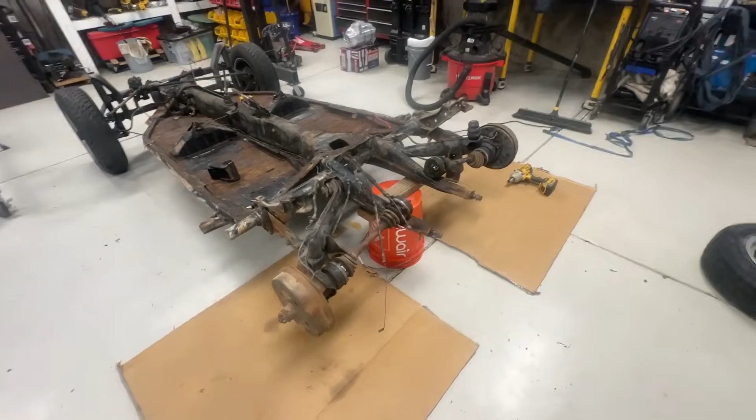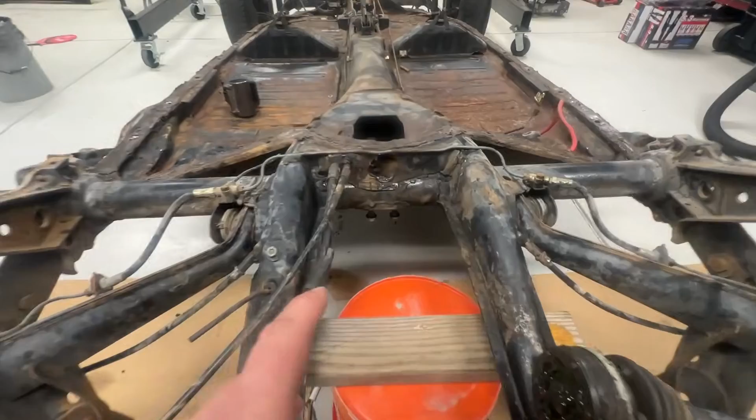And with that, let's go ahead and start taking it apart and see what we see. All right, so this is kind of nice because I've already got the engine out, transmission out, so you really get a good look at what we're working with in the back of the VW Bug. And if you look in here, this is the part that we're going to be cutting out for the torsion arm adjuster. Here's one of the problems I see.

Here are the mounts for the transmission. I'm not sure if they're different in other bugs, but that's what I've got. So somehow after I make this whole torsion arm thing in there, I've got to reconstruct that transmission mount. But to get started, I think we'll probably get rid of the brake lines first and get those off and out of the way.

We'll get rid of the drum brake and all the hub there. The half shafts should come out of there nicely. We'll get the trailing arms off. We're gonna be doing a rebuild on those in the next video. And then we'll start getting the spring out of the torsion tube there.

And then I'm interested to know what we see inside there. Is it the same size splines that go with the Sway Away or not? How's this thing gonna go together? It's all a mystery. We're about to find out right now.

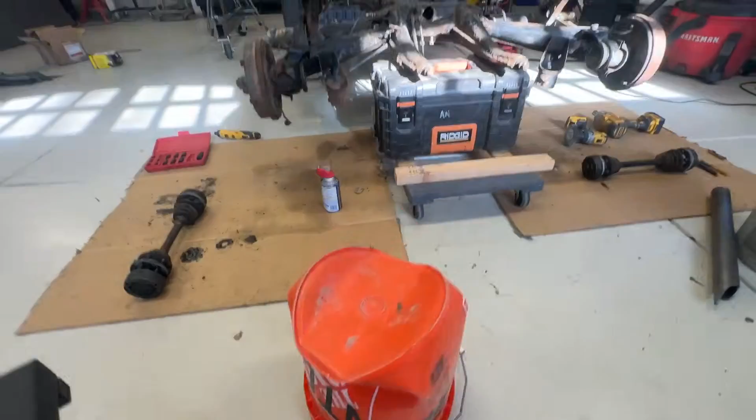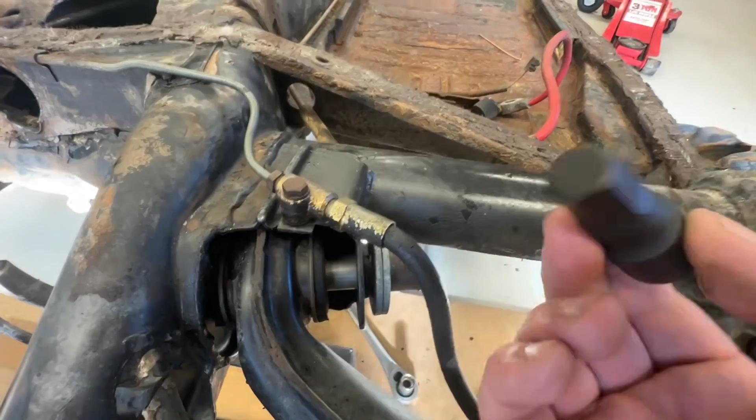Okay, so as it turns out, a Home Depot bucket is not up for that task, but maybe a Ridgid toolbox is. These bolts right here, however, were a lot more difficult to get out than I had expected. It's a 17 millimeter Allen tool, and so that went in there and it came out no problems. I know people replace those. I'm not. I opted just to go and buy the tool kit.

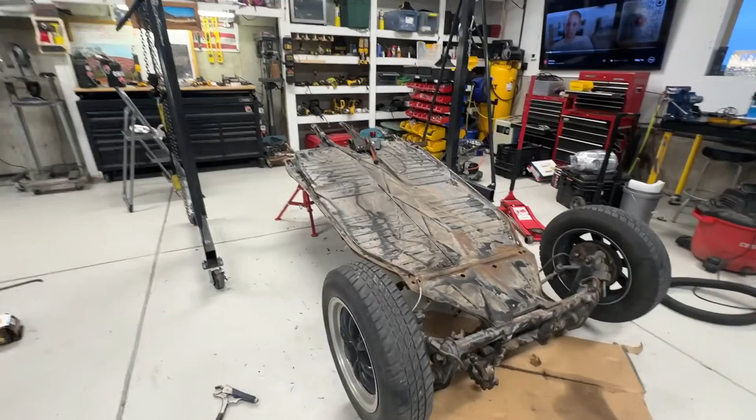So there you go. Time to work on this one. I can't believe it. I forgot to video us flipping this thing over. So basically, with the way it is right now, it just took two of us and we flipped it straight over. It was about 10 feet high, which just cleared my ceiling, and then we put it down on some jack stands over here. Let me show you what we got going next.

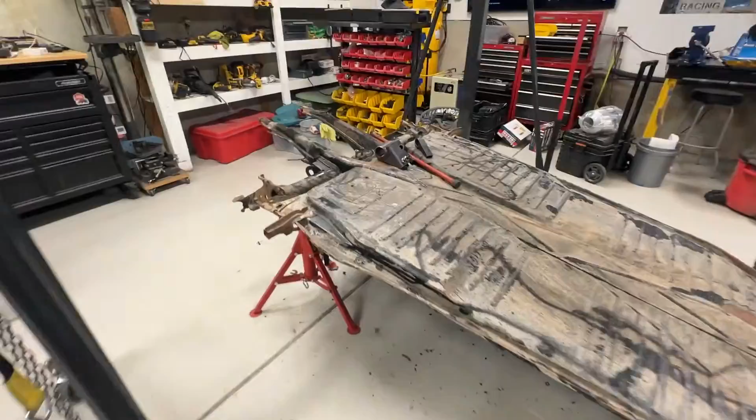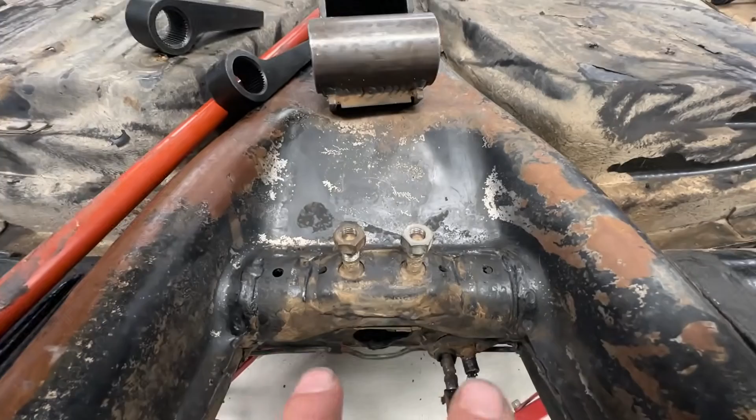Now that it's upside down, I think it's kind of almost important that you do put this thing on with it upside down. This is what I got to cut out. And not all bugs are like this, because I showed this to one of my other buddies who race these things also. This is a transmission mount and not the way others look, I guess. So I got to figure out how I'm going to deal with the transmission mount here.

But anyway, this is what we're putting in here. And so all I'm going to do is basically center this thing up, scribe the lines on here. I'm going to cut the tube right here. I'm going to cut this tube right here. And then I'm going to cut out enough of this such that I can get this thing basically mounted inside there, but also kind of do some welding in there from this side.

I have to flip back over, do it from the other side also. And then the plan will be to box this thing in there. And from what I've been talking to the guys, it doesn't matter how this thing is oriented once it's welded in there, because basically these fingers are in there, and once these bolts push these fingers down, this is upside down, it forces the suspension that way and gives you more or less lift based on doing that.

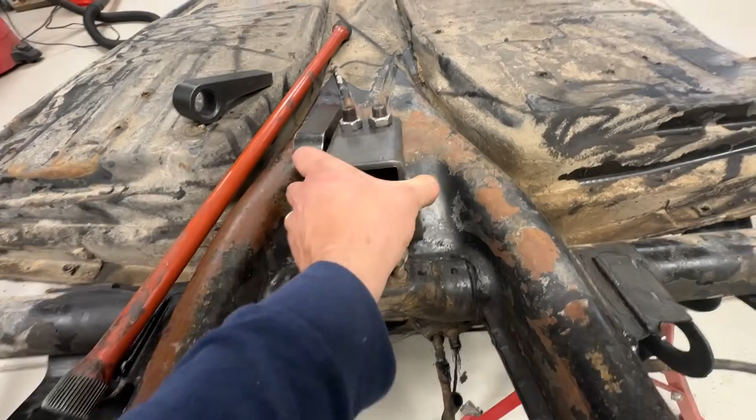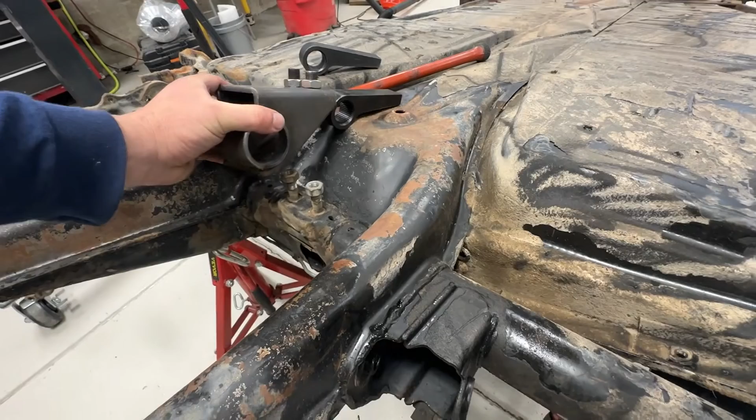But what is important is that these things are oriented enough down such that as rocks come across the body, they don't rip off one of these things. So it'll probably be oriented something like this, kind of facing down, as opposed to level where maybe these things are vulnerable out there. Let's go ahead and get to cutting this piece out.

Well, it's always a little bit scary to hack into something like this, but not that big a deal. Here's the tube, let me show you the parts I got here. Here was the parts of that transmission mount. I might figure out if I can just weld, clean it up and weld that back on there, just because I don't want to make another one.

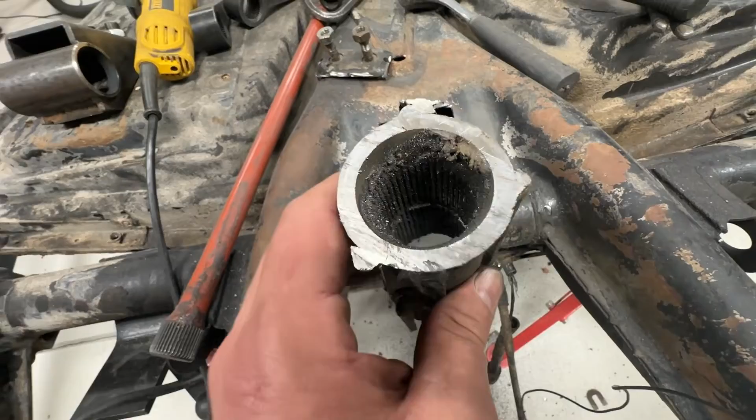Here's the piece that I cut out. You can see the splines in there. And the reason I'm replacing this is because the guys say you can strip these splines out, and these are a whole lot stronger. So anyway, I just do what I'm told. This piece now fits in here real nice.

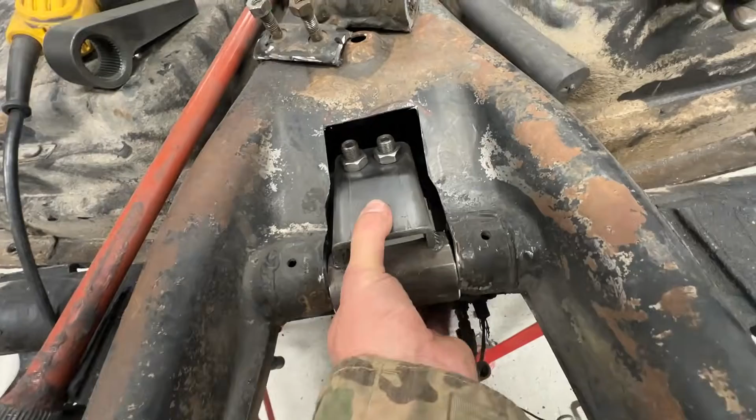So what am I going to do now? I'm going to clean up both edges over here and get ready to weld them. I'm going to do a combination of welding - some TIG welding where I can, so I'll probably TIG weld these parts. Then on the other side, on the inside, I'll probably do some MIG welding inside there just because I won't be able to get in there and TIG weld.

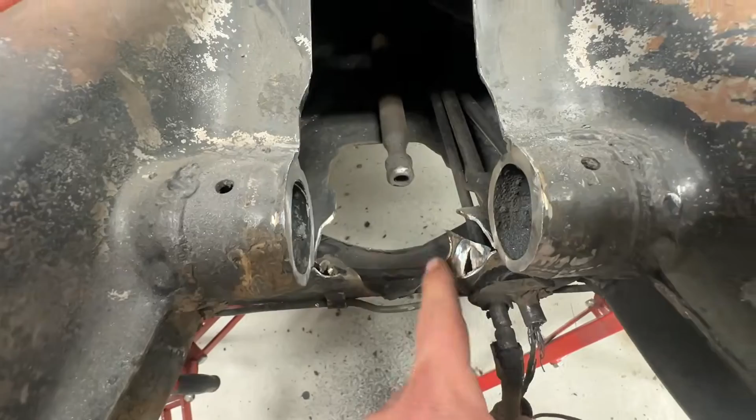I got to clean back some of this sheet metal. I don't care about sheet metal. I really care about strong welds to maintain at least the integrity of this tube here as much as possible, and then to resist, because this thing's going to want to, every time you hit a bump, it's going to want to do one of these - it's going to want to turn.

So what I'll do is these welds right here, obviously on the tube, will probably resist a lot of that. And then just for some insurance, we're going to box this in with another piece of probably 1/8 inch plate, which I'll cut on the plasma table. I'm going to show you how I plan on making this a box, I think, as easy as I possibly can on myself, such that I can get it in there and make it look real pretty without having to do a whole bunch of crazy math.

So let's go ahead and prep this area for some welding, and then we'll cut some parts out on the plasma table.

All right, well, we're going to do a little bit of CAD, computer-aided design, and I do this all the time. I do it for guys who are better fabricators than I could ever be, and they just say, I just can't learn CAD, for whatever reason. Well, if you can draw lines, circles, and squares, you can do computer-aided design.

It's super easy. So we're going to cut something on the Langmuir Systems Crossfire XR, and to do that, we need to first draw what we're going to cut. So we're just going to cut some really simple pieces. I'm going to go up here, and this is Fusion 360.

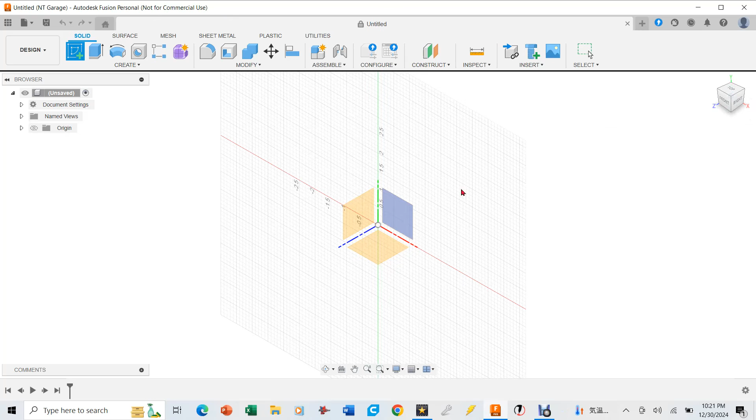I'm going to say I'm going to create a sketch. Over here, you see on this little block, it shows the Y is up and the X is to the right. That is the plane in which all plasma cutters cut on, and the Z is usually the torch height control. So I'm going to click on that plane. So now I'm drawing on that sheet of paper, which is the X and Y plane.

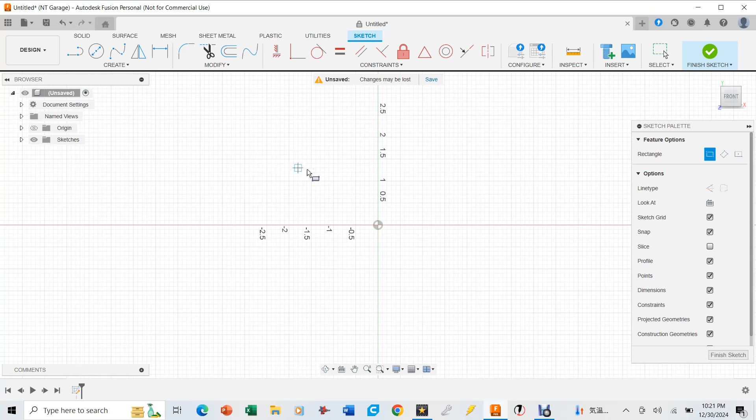So first thing I need to do is make just a rectangle, so I'm going to hit the hotkey R, and when I say hotkey, I'm clicking a key on my keyboard, and it brings up rectangle. So now I can kind of click anywhere, start scribing that thing out one time, and then once I've started scribing the line, I can just go ahead and punch in the values that I want.

So it's going to be 3 1/8 inches wide, 3.125. Let me hit the tab key to go over to the other side, and this is going to be 2 inches high. That's going to be one side of this closeout thing I'm going to make for this whole thing. So that is one shape.

Now what I'm going to do is, since this is a 2-dimensional shape, I want to make it 3 dimensions, just because when you cut things on a plasma table, it's easier if they're in 3 dimensions.

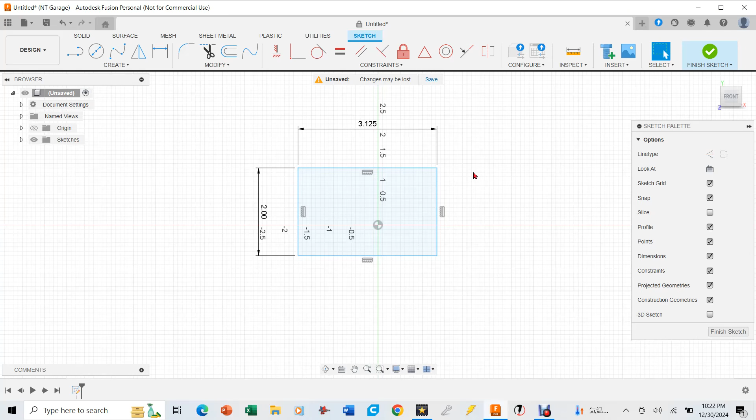So I'm going to hit the hotkey E on my keyboard, and that's going to go into a mode called extrude, which basically means I'm going to give this thing 3 dimensions. And I'm cutting out of 1/8 inch plate steel, so I'll say 0.125 again, and that makes it a 3-dimensional part.

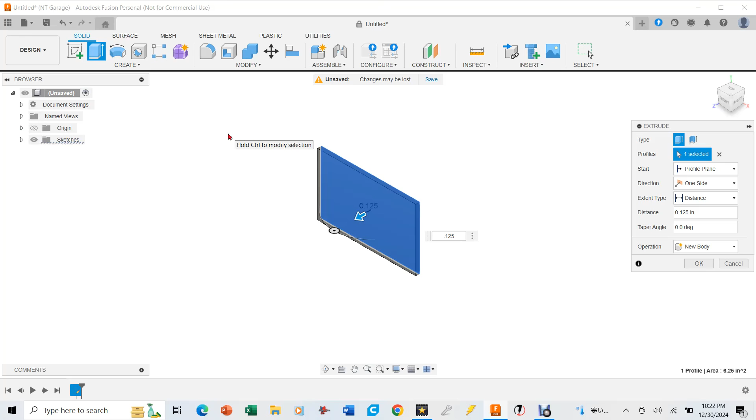If you watch over here where I have origin, sketch, and all those things, I don't have a body yet. But as soon as I hit enter, there goes a body, and now this becomes body number 1. If I scroll down, that's body 1. I can turn it off or on with the little eyeball if I want to see it or keep it from interfering with other things I'm making.

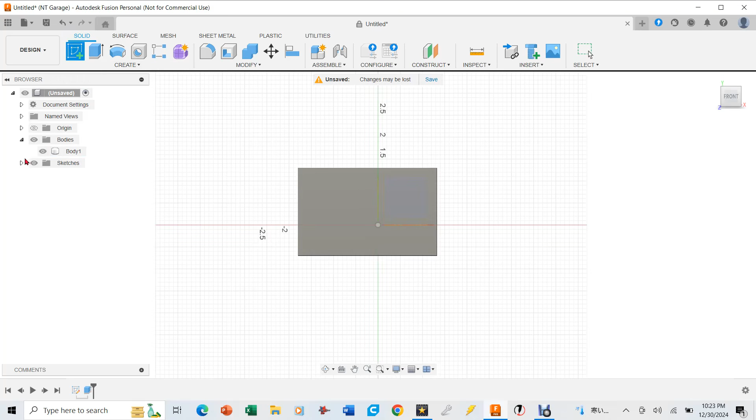So now I need to make another body. I'm going to go over to sketch, and once I click on this same plane I was on before, it's going to start sketch number 2. So now I have 2 sketches and 1 body — you basically work in bodies and sketches most of the time.

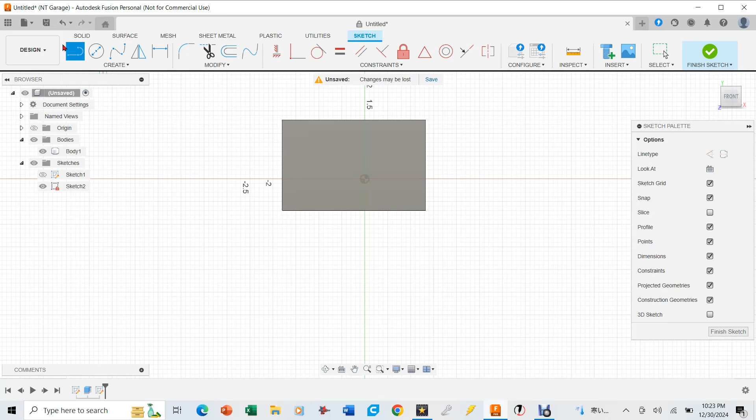This part is going to be the side plates for this closeout panel. I'm just going to start making some lines. I'll hit hotkey L, and a line comes up. This thing I'm making is going to be 2 inches vertical, then over 3 inches, then up 1/4 inch, 0.25.

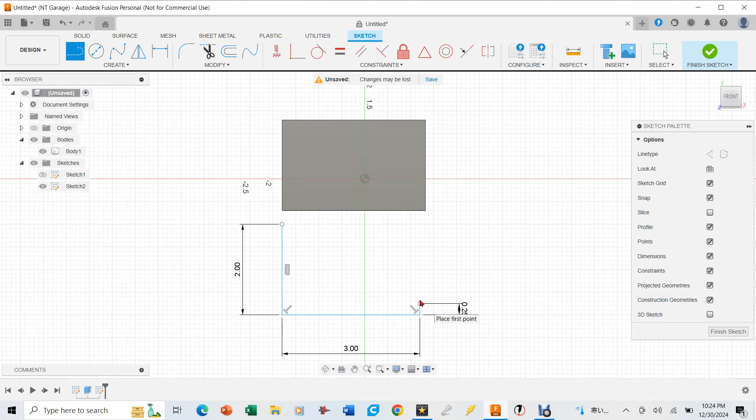Then basically hotkey L again to close that whole thing out. I'm going to click on that and that. As soon as I click on this, you'll see it's all white, but as soon as I enclose the space, it's going to turn blue. That tells me it's enclosed and I can extrude it.

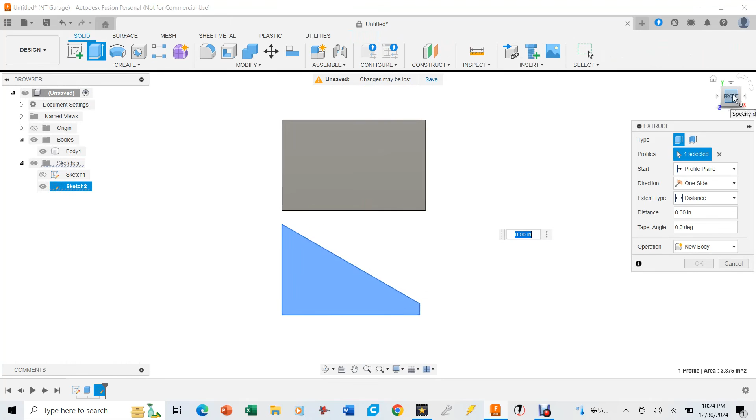So I'm going to hit hotkey E again, click on that piece, click on it again, and click over here so you can see it go 3 dimensions. I'll say 0.125 — you can see it has some shape to it now. I still have one body until I hit enter, and now I have 2 bodies over there.

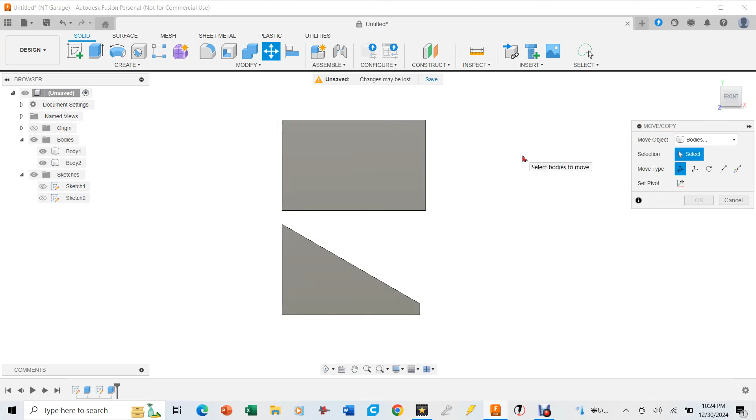Since I need 2 of these, one for both sides, I'm going to hit hotkey M for move. I'll click on the body, and it still says body over here. I'll say create a copy, then flip the second copy over so I can nest it, and move it. Now I'll be able to cut both of those pieces.

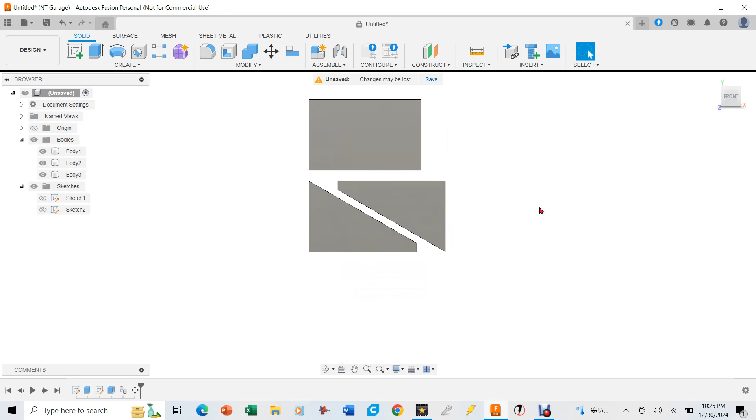Now I've got 3 bodies. I just need to make one more, which will be the big piece that lets me double up and close out this whole panel.

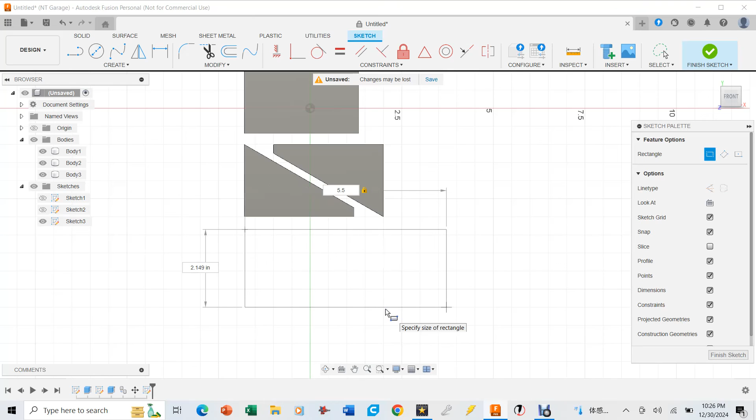So the whole plate is going to be — I'll first go to sketch it on that same plane, and hit the hotkey R again for rectangle. Width is going to be 5.5 inches. I'll hit the tab key, length is going to be 7.5 inches, and I'll hit enter on that.

It turned blue because it's all enclosed — I could extrude that if I wanted to. Then in the center I'm going to cut out a piece that's 6 inches tall and 3 1/8 inch wide. So I'm going to go over here and hit hotkey L.

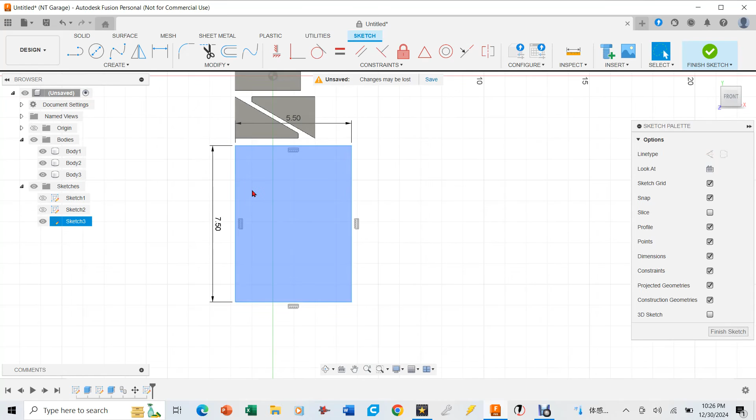Let's see if this works — I'm going to hit the X key. The X key turns this from making a normal line into what's called a construction line. You'll see over here on the right, when I hit X, line type goes to construction line. That allows me to draw a line that will not cut. If it's a solid line, it's going to create a tool path.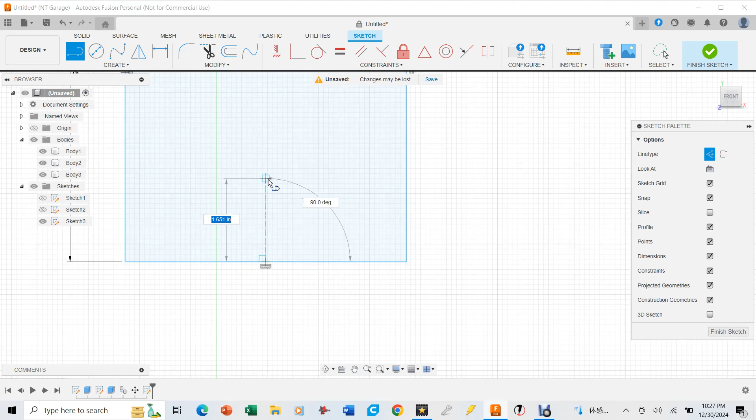And if it's a dashed line like this, it won't create a tool path. So I'm going to show you one more thing here. Hit hotkey L again and bring the line up. As I bring this cursor over to this line in the center, I get that little triangle there, telling me that if I click right now, it's going to grab the midpoint of that line. That's basically what I wanted.

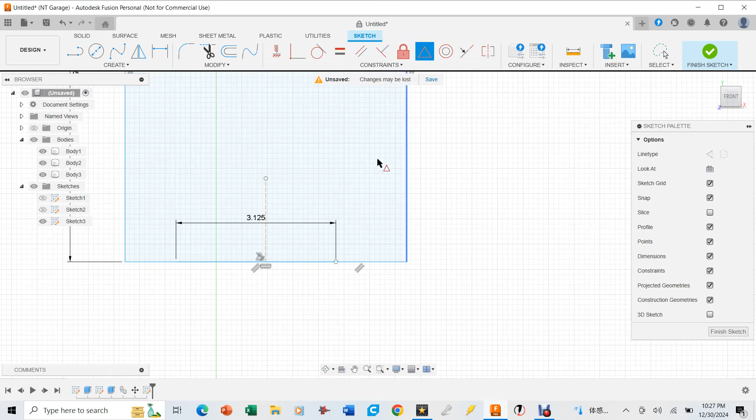I just wanted that for a reference. Now I'm going to draw another line, this time with construction lines turned off. This one is going to be 3.125 inches. I'll hit enter, then grab this construction line's midpoint. I'm going to select that line - nope, not that one, I'm going to select the midpoint. I want this line, and I want the midpoint to be right over there. Now you can see I was able to force that to center itself on that point, since I had that point right there.

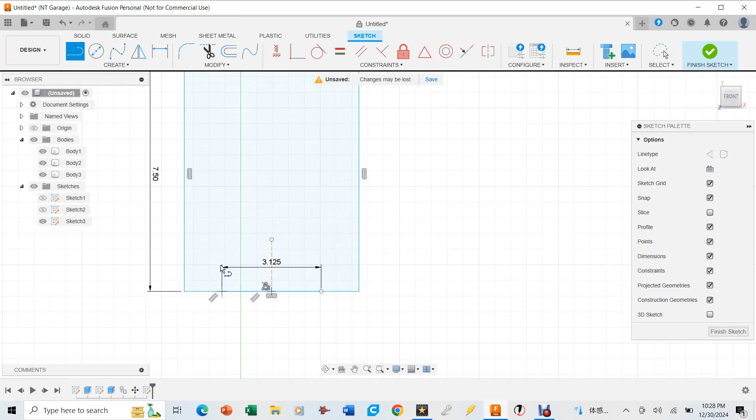Now I'm going to close this thing out. Hit hotkey L again for a line, and I'm going to go up 6 inches. Then hotkey L again - I'm going from here, and as I bring my cursor to it, it makes a box as it snaps over that line. Now it's saying it's coincident with that point. 6 inches, and then hotkey L again, and this should be 3.125 inches.

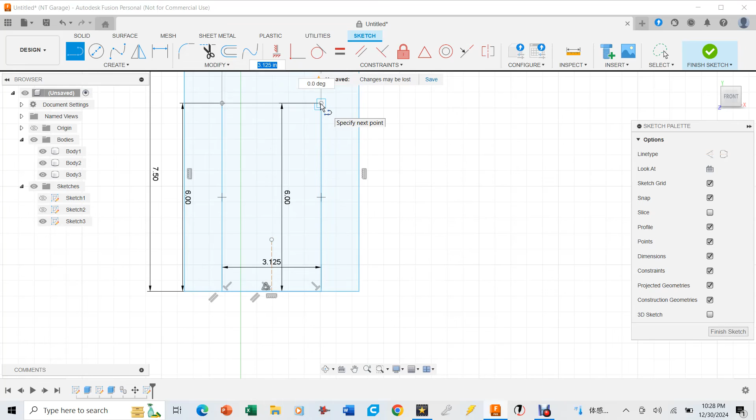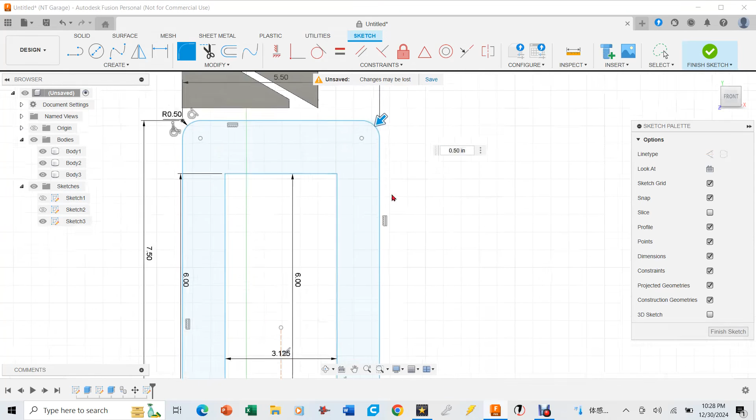There we go. Now I'm going to take my scissors and cut this line off down here at the bottom, because I don't want that - I want that to be an open space. That looks like the shape I want for the most part. I might just soften these edges up here at the ends, making them some fillets. Make the same one over on this side. That looks like my closeout panel I'm going to make.

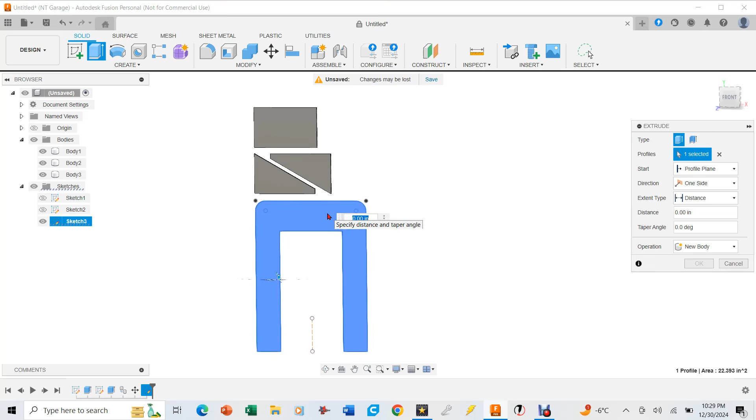So now I'm going to hit hotkey - oh, I've got to hit enter to finish up those fillets. I'm going to hit hotkey E to extrude this. I'm going to select this part. Did I select the part? Did I get the right thing? Let's see here. All right, select it, there we go. Now we've got 1.125, and when I hit enter, boop, there's a 4th body.

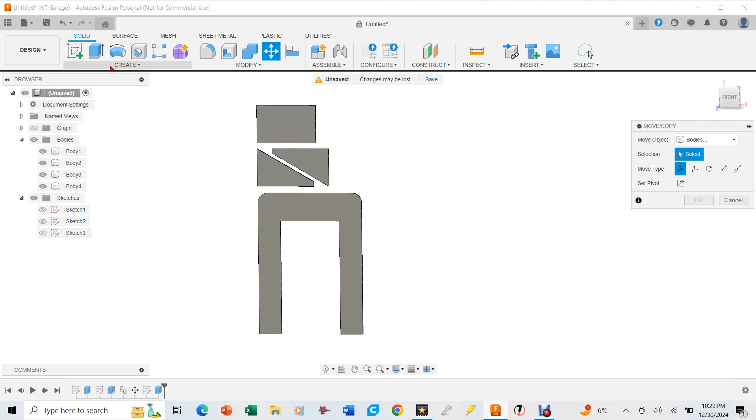Now I've got 4 bodies. Now it's time to cut this thing out and manufacture it. But something I can do that you can't necessarily do if you're fabricating otherwise is I can nest things inside here, so I waste as little material as I possibly can. I'm going to move this thing - let's take this one first, rotate it this way, and then stick it right in here. That way it'll cut that piece.

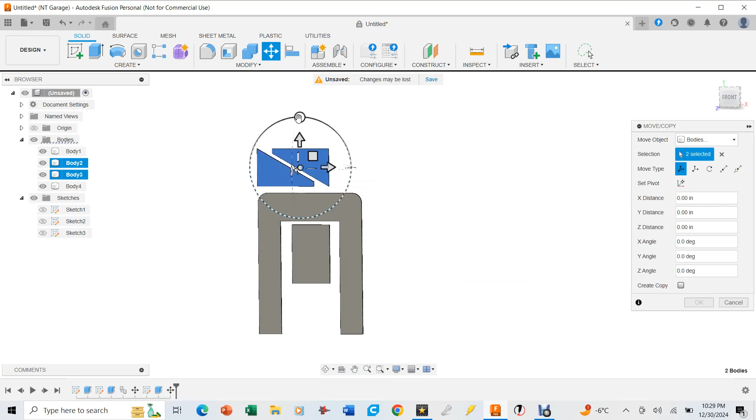And then we'll hit enter, and then we'll move these other pieces. This, and we'll hit the shift key - actually, I'll grab them both. We'll turn them both this way, and move them right there. How about like that? Enter, hotkey M again. We'll grab this one and just move it right over here. That way I think I waste the least amount of material.

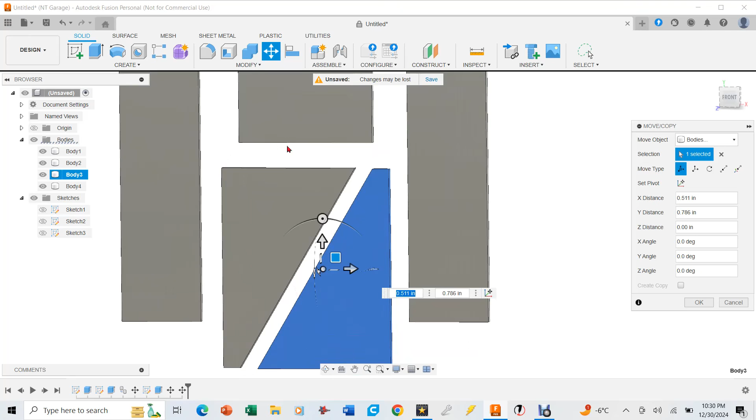In general, when I go to cut something on a plasma table, if I can get about a quarter inch between the pieces, that's going to be enough. I'll say enter. And in fact, the way I cut my material, I think I just want to turn the whole thing, so I'm going to hit hotkey M again. I actually wanted to cut in this orientation, so I'm going to turn it 90 degrees. There we go, and now it's going to go into my machine like this.

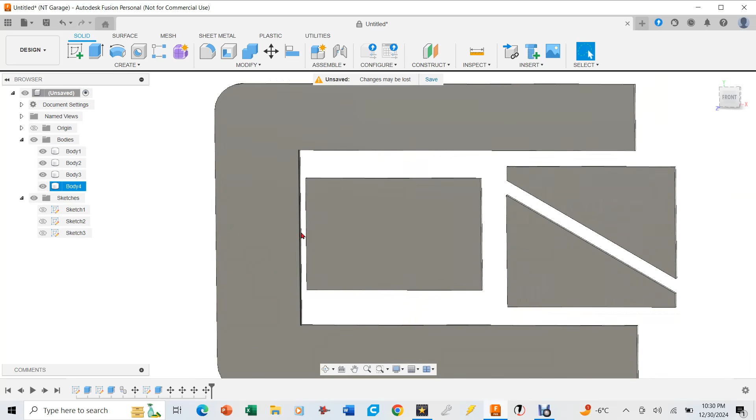So now, this looks a little tight right here, looks a little close. One more time, one more time, right there - let's move it right there in between those two. Cool.

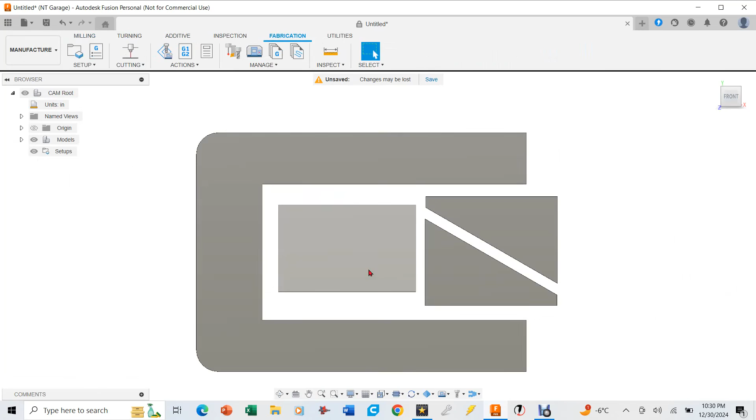That looks good. All right, so now we're ready to go from computer-aided design over to manufacturing, or CAM, computer-aided manufacturing. We've gone to a whole other part of the Fusion 360 software, which allows us to make the G-code to put this into the Langmuir Systems FireControl so it can cut this thing out.

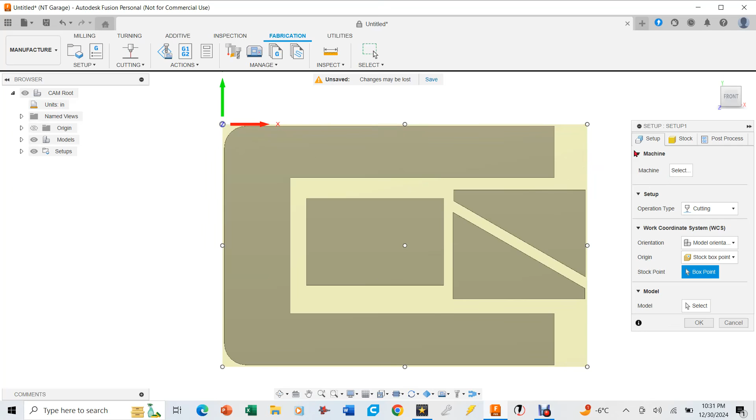So the first thing I'm going to do is go to setup, and I'm going to say this is going to be my box point - this is going to be like the point where the program basically bases itself off of. I always pick the top left, because I go through my steel like I read my books, top left to bottom right. Let me see - it'll pick all those parts. I'm going to say close out.

All right. I'm going to say okay on that. It's good. Not going to like that, but I wanted to continue anyway. It wanted me to pick each of those points, just not necessary.

I'm going to go to cutting, and I'm going to select the tool that we're going to use. I've been using a Razorweld for 4 years now. It is awesome. I'm not going with a Hypertherm for my plasma table. I do have a Hypertherm on my Dragon A250 from Bend-Tech, I just don't use it on this. There's my Razorweld 45.

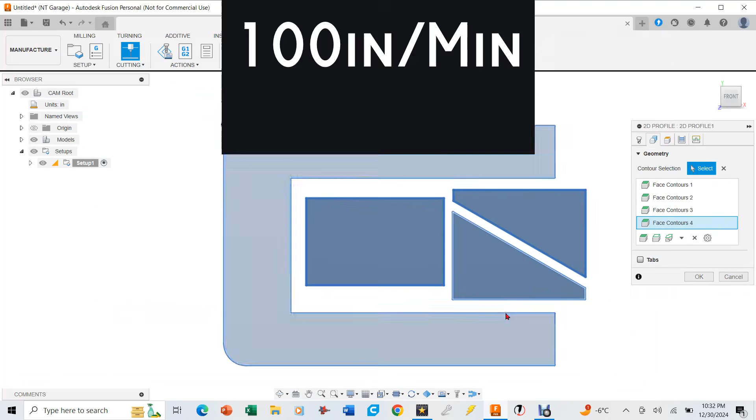And since I'm cutting 1/8 inch plate, I'm going to cut that at 100 inches per minute. I'm going to go ahead and pick all the parts that I'm going to cut. And then we can go ahead and select our entry and all that to try to minimize the kind of marks you get. I say usually about 0.05. I enter and exit at 90 degrees. And I'm going to say 0.25 is going to be pretty good. And how about we start here in this corner. We'll just start down here, about right there. I got to get a corner that's not going to overlap with something else.

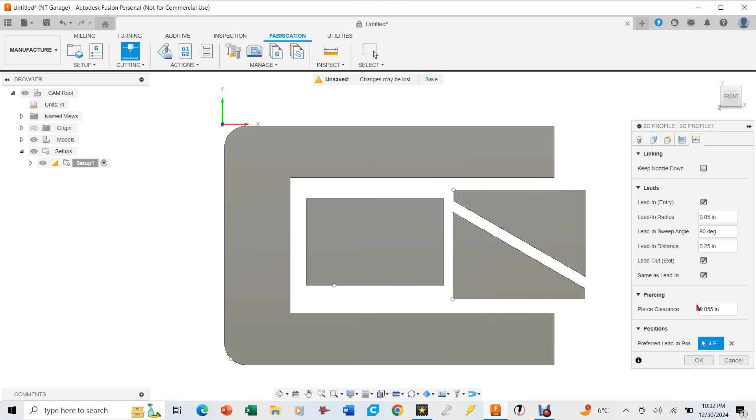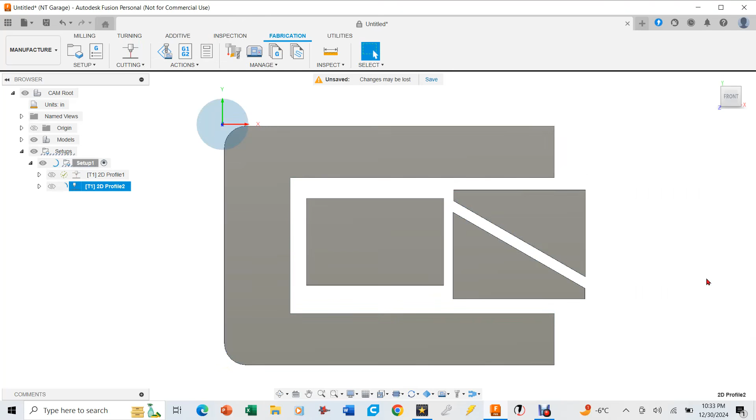I've got all those things picked. And now it's going to generate the G code. This is what the pattern is going to look like. So I can see it's going to enter there, and it's going to cut all those parts. This one right here could be problematic. It's getting kind of close to that piece. So what I can do is go over to cutting again and select all these things. And sometimes I'll just let it pick its own tool path and see if it does better than my initial decision. See, I don't like this.

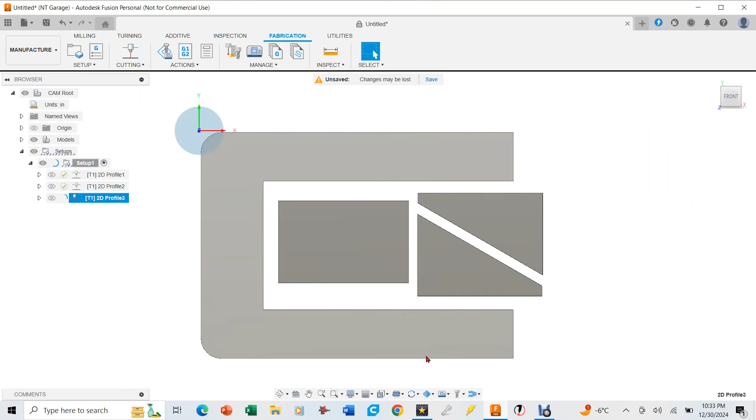If you zoom in here, you can kind of see this thing's going to fire the torch too close to this piece, and I think that it could put a nick in that piece. So I'm going to tell it, no, that's not where I want you to fire the torch. I'm going to tell it to cut again. Again, you got to pick the pieces again. Go over here to the end, and I'm going to say I wanted to go there, and how about right here and right over there. And now we can tell it where we want it to enter and start all those cuts. And now you see none of those will overlap. So that looks pretty good.

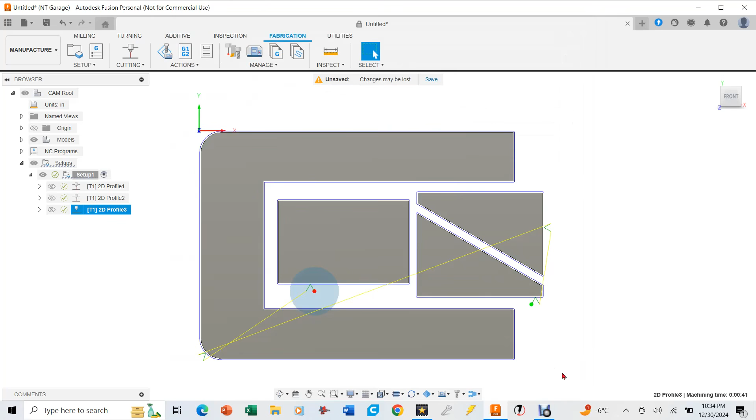We're going to go over to post the G code. I use a 0.3 pierce, that's fine. A 0.2 second delay. And then I'm just going to pick the folder I'm going to put this into. All right, I'll pick that folder. I'm going to call it the rear suspension for Trooper. And there we go. I'm going to post it. And now it is ready to go over to FireControl and cut this thing out on the Langmuir Systems Crossfire XR.

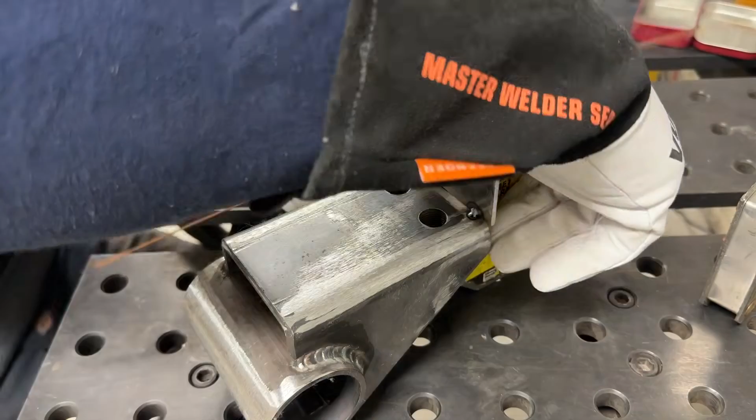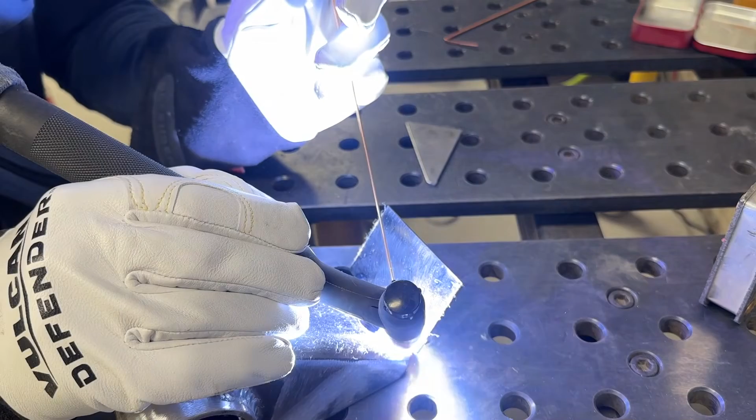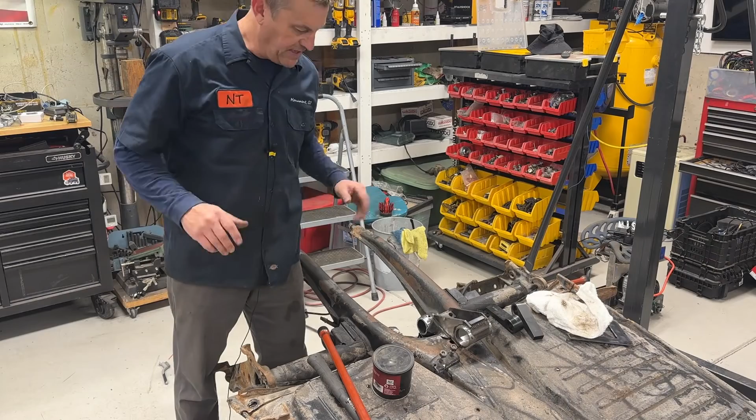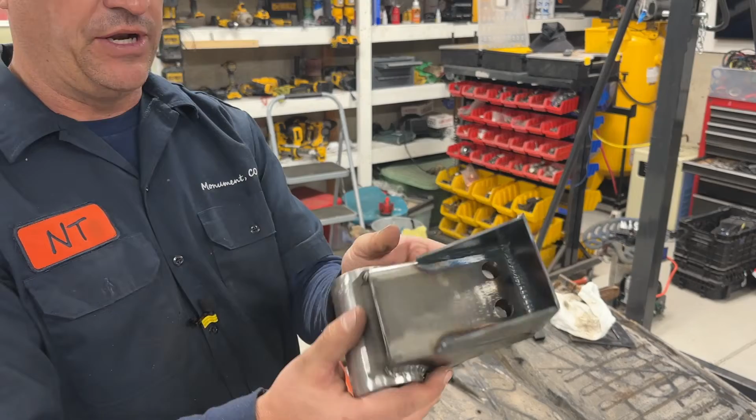We are officially at the point where I'm making up all the steps. You can kind of see what I did with this piece, the adjuster. It's going to sit in there like this. This is where it's going to be boxed in. I just kind of pre-welded those pieces on there. So now the challenge is, how do I get this thing lined up inside here? And I think just using the springs as alignment tools is going to be the way to go. Once those things go in, I don't think they're going to come out because they are so tight on the splines of these adjusters. So I think they go in one time, at least they are going to for me.

So I'm going to put a little bit of grease on the splines. Again, it just feels like a good idea. There's nothing telling me to do that, other than I think it'll keep down any kind of corrosion in there if there's some grease in there. Maybe they'll come apart later on. I kind of doubt it. They're really tight in there. And I'll also put just a little bit of grease on the inside of the adjuster piece. Maybe it'll slide in there just a little bit easier.

I doubt that too. Now I'm going to go ahead and kind of pre-assemble this thing. I'm going to put this in upside down. I realize I'm going to flip it around once it's in, but I'm going to put this thing in there upside down just to line everything up.

I'm going to slide this shaft into the housing all the way through, and then I'm going to take a mallet and start tapping that shaft into the adjuster. Once I have both of them in, I should be able to flip this thing over, align it, and then start welding it into place.

Let's see where we're at with this progress here. We've got the housing in there. It took some beating. I tell you what, to get those shafts in, I put these over the ends there just to kind of center everything, but to get those shafts far enough into the little adjusters in there, it took a beating. But they're in there. And so that thing's pretty much centered up.

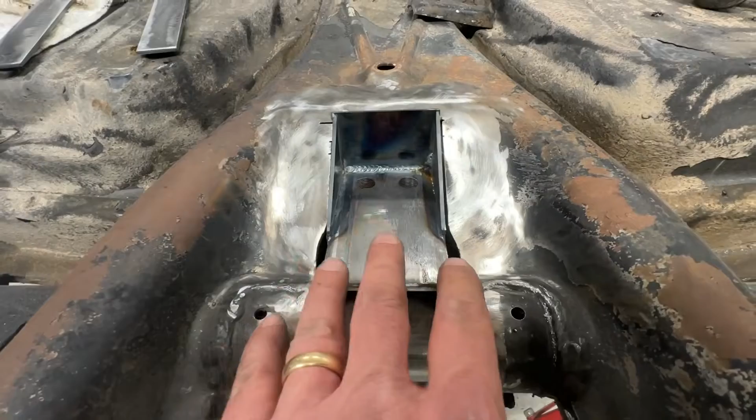This is where I'm gonna TIG weld it as much as I can around the tubes here. And then once that's TIG welded in, I'll still have some MIG welding to do from the back side. I'll start shaping this piece to close that whole thing out and make it look as good as it needs to look on the underside of a 1973 VW Bug. Let's get to some welding.

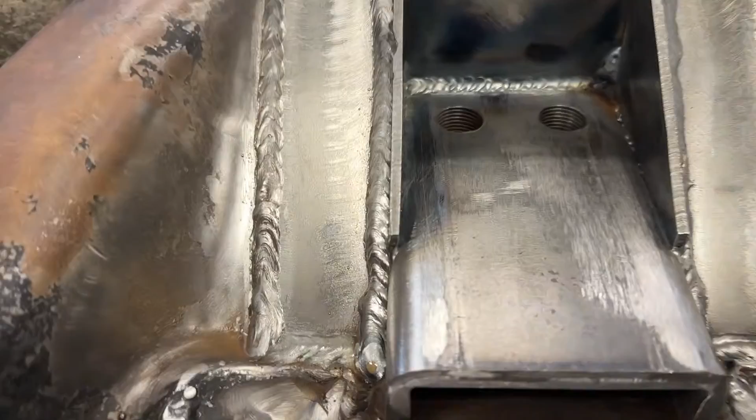I got this thing burned in. You can kind of see, I hate MIG welding. You can see where I ran out of talent in some spots, but I think this is going to hold on there pretty good, so I'm not worried about that. And it's the bottom side of the vehicle, so a little bit of spray paint, I'll look like a pro.

Next thing I'm going to do is work on figuring out how this transmission mount is going to go in here. I'm going to get the transmission, mount it up to this thing, and figure out how it will interface with that mount. I understand that my mount is a little different than other people's, so I'm just going to do it, and then I'll show you what it looks like when I'm all done.

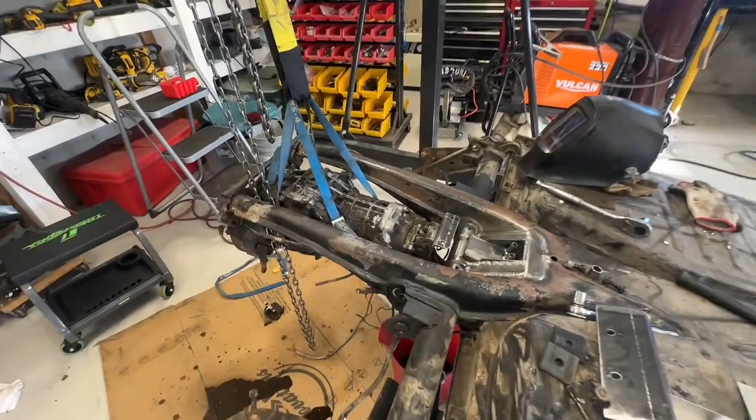All right, nobody make fun of my janky transmission. I know it looks messy, but it works, and if it works, it works. We'll clean it up. It'll look pretty. Anyway, here's what I came up with. The transmission mount, it had some other mount. It was completely coming apart. I'd have to put 2 bolts here. It just wasn't really going to work.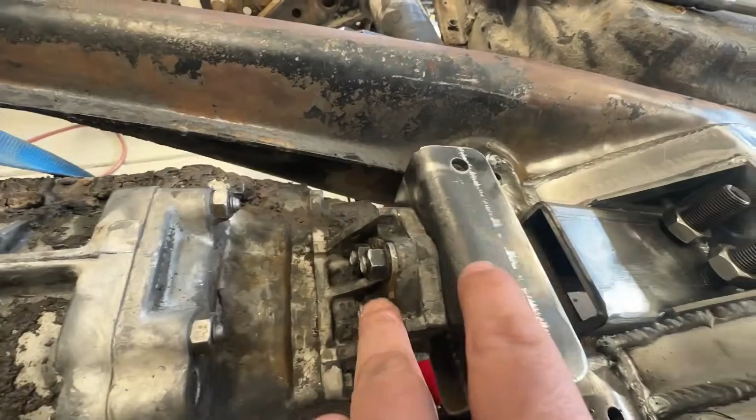So what I did, this went over to the plasma cutter. I made this plate. This is 3/16, probably totally overkill. It bolts through there in 3 places. And so then I got these 2 bolt holes right here. And I made this piece. Well, first I'll have these pads. I think these are for shackles or something like that. They're super durable rubber. Those will sit right in there, hopefully to take a little bit of vibration out before aluminum starts to crack.

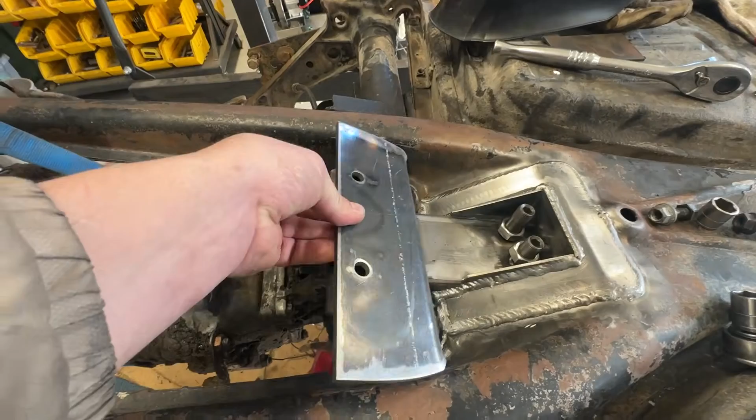And then this plate will just sit right on there on top, going in there one-handed. Those holes do line up. And so it'll weld across there, across here, and across there. And then whenever I take the transmission in and out, it's just got 2 bolts, which will make it pretty easy, and the weight will sit on there, making maintenance easy.

I don't know if this is legal in the Class 11 world. We'll probably run it. And if somebody says something, we'll change it. But right now, this is the best solution that I could come up with. Anyway, I'm going to burn this in, and this project's pretty much done.

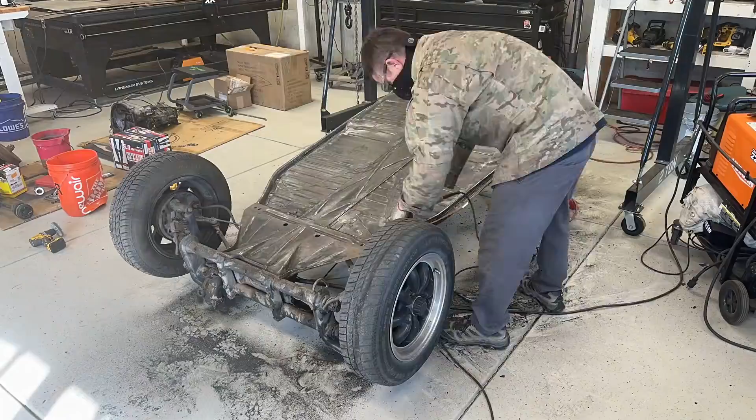All right, this might be hard to believe, but this thing will be a race car in 2 months. So we've got a whole bunch of content coming up for that. Like I said, I'm doing the trailing arms. What'll be really cool is I'm using BendTech. I'm doing the whole design for the roll cage for this thing, and I'm showing you how you could do it yourself, and then I'll be cutting parts out on the Dragon A400, welding it together with Harbor Freight's ProTig 205, a lot of cool stuff.